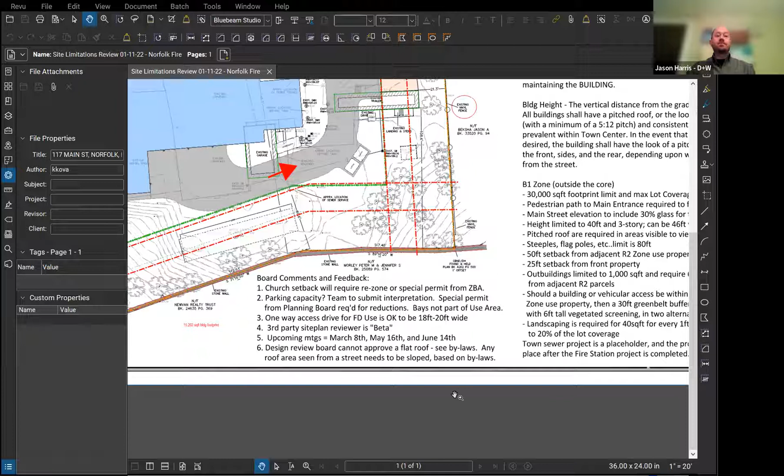So this is the west property line, this is against the church. We're going to need to get a special permit - it does not come from the planning board, it actually comes from the zoning board of appeals. We're asking to get the setback from 50 to 30, so that's the discretion that the zoning board has. The next thing we're going to ask along this same property line is the 30-foot green belt, which the planning board has the ability to waive. So 2 special permits, but really it's all rolled into one for this western property line.

One is, if we get rid of that 50-foot setback and it becomes 30 feet, then we can get our driveway in there. And then it's just a matter of how much money we need to spend on landscaping to separate our driveway from their parking lot. I think the residential screen, even if you read it in the bylaws, references the fact that residential properties want to be screened from business use.

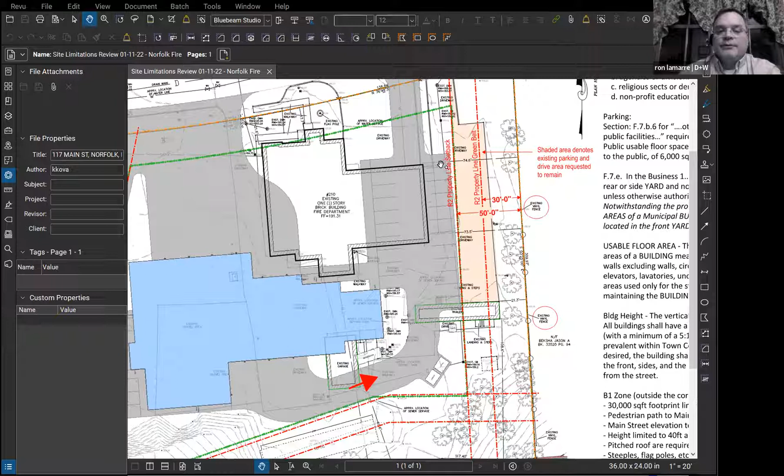So, or downtown use. So anyway, that's one. The other one is this parking - they consider this being in the front yard because the beginning of the parking happens before the face of the building. And the planning board seemed like, oh yeah, you just need to apply for a special permit, and we understand the site use and so forth.

And the last special permit we need is the number of parking spaces. In discussions with the chief, we're targeting 30 spaces. If you interpret their bylaw the way we interpreted it, you would need 20 parking spaces, in which case we'd be asking them to add 10 more.

But you could also interpret it meaning an occupancy level where the meeting room, training room becomes an assembly space, the bunk rooms become residential use. And so if we went down that road, we'd need about 50 cars, in which case we'd be asking them to back that down to 30.

So I think the way we're going to write the special permit is exactly that way. We're going to say one interpretation lands us around 20, one interpretation lands us around 50. We actually only need 30. The special permit is to allow 30 parking spaces.

And like I said, chief, if they end up saying we want you to have 31 or 29, 25 is fine with me too. As long as we get above that 20 threshold, I think we'll be good.

And just for what it's worth, every parking space, if we get the cost, we could figure out how many parking spaces and what the cost is per space. It's usually a pretty good chunk of change. And every parking space we don't need becomes less impervious surface, which means our drainage system goes down.

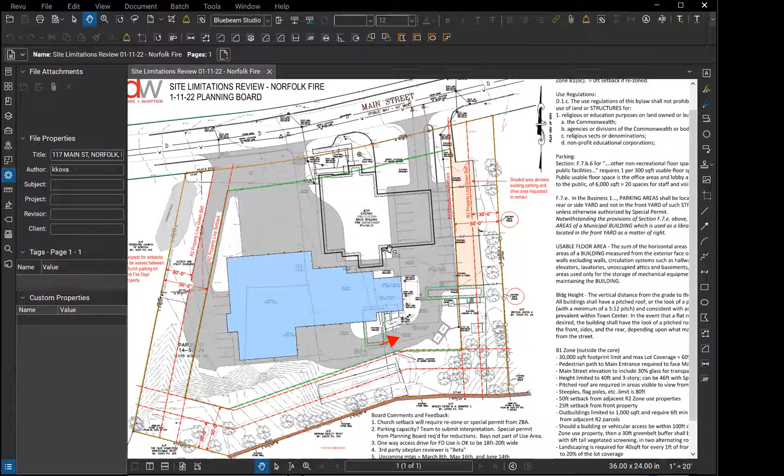Got it, sorry. But it's a good question because, Chief, if you had 40 people in your training room, how many people would you also have on shift?

I think you're going to have a minimum. We have a minimum of 4 right now, but if that meeting was going on and we had a recall during that time, it could be up to 12.

If we go based off of our numbers averages, the turnout on a full recall is about 8 people plus the 4 that are on shift. That's 12. And if you add that to 20, that would be 32.

Well, it feels a little safer to be closer to 30. Just my 2 cents.

30 was the magic number, but if it's saving us a pretty good chunk of change for 5 spots, in the event that we play the law of averages and have a full recall while there's an event going on, we'll just adapt and overcome like we always do.

I would love to have more parking, but if there's something that needs to be cut to save a little bit of money on the day-to-day operation, if we've got 25 spaces, that's plenty.

Well, we don't have to make a decision tonight, but maybe you and Blythe can discuss the idea of what's, 25 to 30 spaces. I don't know, 5 spaces is 5 spaces, right?

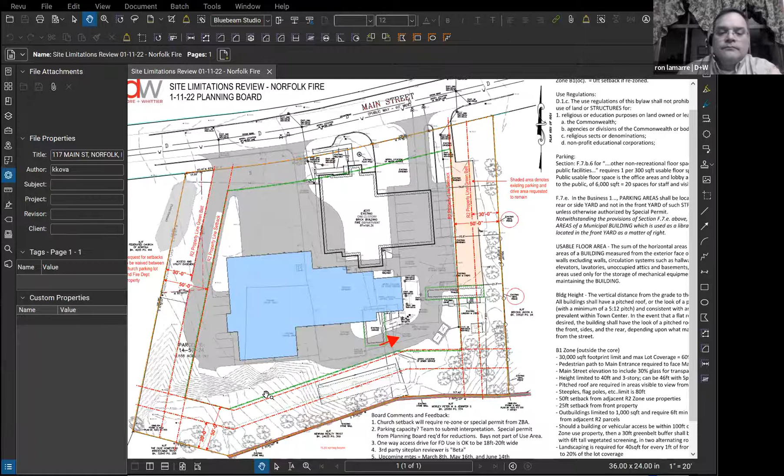I had 2 things in my notes. One was the chair of the planning board seemed pretty keen on allowing travel around the back of the building. I know we've got that large ledge outcropping there. I guess maybe we should have some sort of response next time if we're not doing it, explaining that we think it's going to cost roughly X to do that.

From a code perspective, it's not required because we don't need the additional perimeter access. It's just a convenience thing. I know on much larger projects, when you do the math and the code, most fire departments want to get around the whole building to have access. So you'll be able to park a fire truck here and run the hoses here, and park a fire truck here and run the hoses again here, without going around a corner. That's really what that 30-foot access is all about.

We are taking a look at the design of the building. We talked to the working group today about possibly pushing this wall in.

Oh, you're breaking up a little bit, Chief. While Chief is unbreaking... Oh, stuff I was going on to say, go ahead. No, we lost him again.

If stuff goes on the roof, where would access need to be to get up to get stuff?

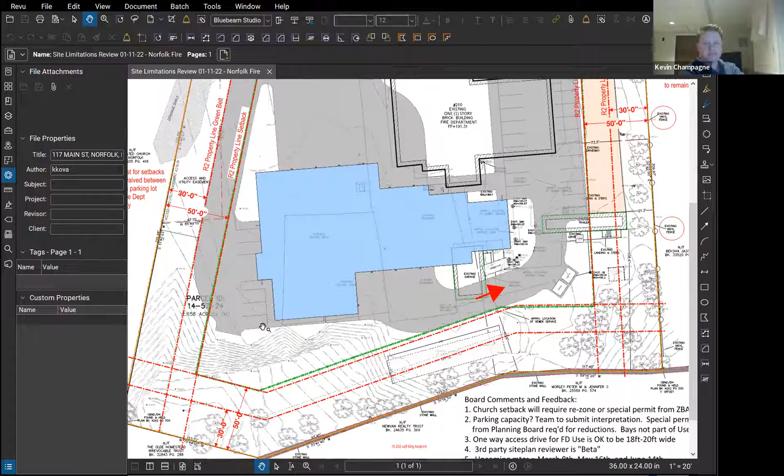If the intent is to use hoses or training in that field, there's going to need to be some sort of water reclamation or irrigation or water management that takes place in that area, even if there is ledge.

You mean talking about drains in the parking lot? If you move your cursor down towards the bottom of the screen, keep going, right in that area where you said you could run the hoses without having to run them around corners.

If they are using hoses in that area, it does put out a substantial volume of water that would need to be dealt with.

Right, but that'd be like a one-time event when the station burns down, right? I mean, the chief could speak on it based on how his operations are, but typically training with the lines takes place, or training with the pumps, and to have an area where they could do that close by, I think would be beneficial if it's within the scope of the project.

Would that be something that would take place in the parking lot, or are you suggesting something else? Regardless of where it takes place, there would need to be some sort of water management that goes along with it.

Yeah, we could potentially use that, but we have the aprons and the driveway spaces, which are great for that. And if they have drainage included, they should hopefully be able to handle it all for us.

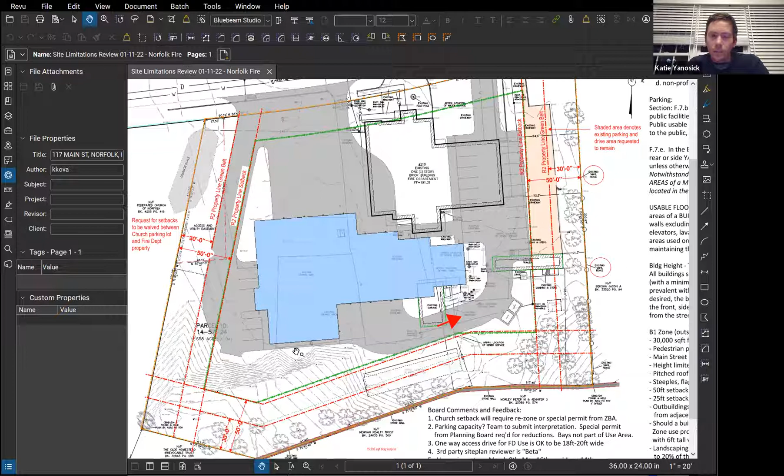Again, the chief would probably know better than I would. Well, that's another good point because your hydrant is right here, so if we did put a wall connection right there - if I could add to that too, Jason, a lot of times when we do those training stairs, especially when they're wet, we'll do a Siamese connection at the stair just for that purpose.

But it would need to supply the water to the engine company rather than have the engine company supply the water to the Siamese. Yes, correct.

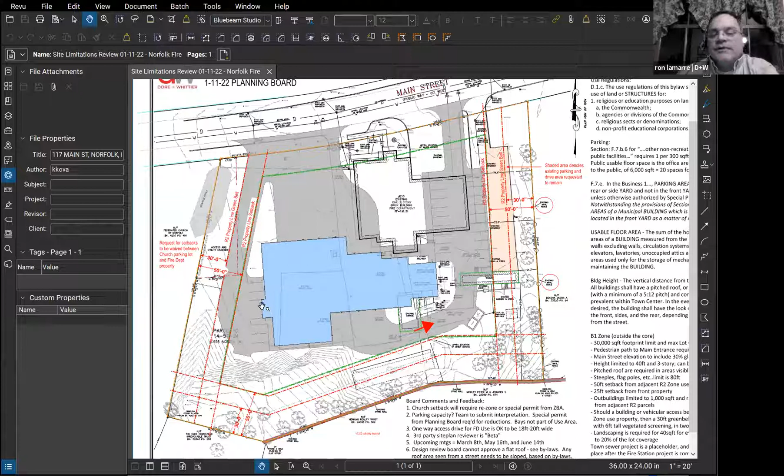I guess what Jason is saying is that the Siamese is not connected to the sprinkler system. The Siamese would not be, for training purposes - that's connected to the water line. Right, yeah.

And to that end, one thing you may want to consider—I don't know if your water district will allow this, but it's part of our notes to work out with Matt during our department meeting. Most sprinkler systems are separated from domestic water outside the building.

The question we would have is, does it make sense to have three separations? One goes to your sprinkler system, one goes to your domestic water system, which pretty much ends up in the sewer, or the septic, I should say. Should there be another dog-leg off of that line specifically for training?

Because I think, Blythe, correct me if I'm wrong, you get charged for water use based on what's going in, especially if there's a sewer project coming up in the future. You'll end up getting charged for what gets dumped into that sewer. Generally, water system and sewer charges are based on how much water flows through your meter, and the sewer is charged on most, maybe sometimes all of it.

So what I'm thinking is, do you want this off the meter? Because it's recharging the ground. But if it's treated water that the town's providing, and we charge each of our building users for water, why would we treat this one differently? That's another question to be pondering.

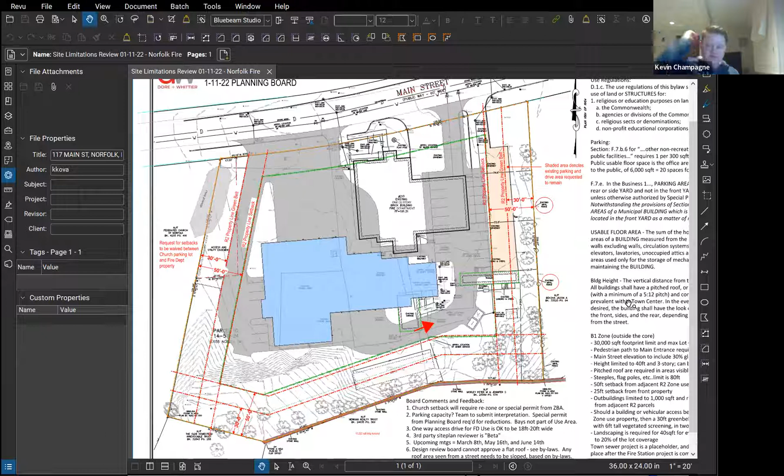Chief, you're still really breaking up. I don't know if maybe if you turn off your video, sometimes that helps. We lost you, Chief. I think we lost him.

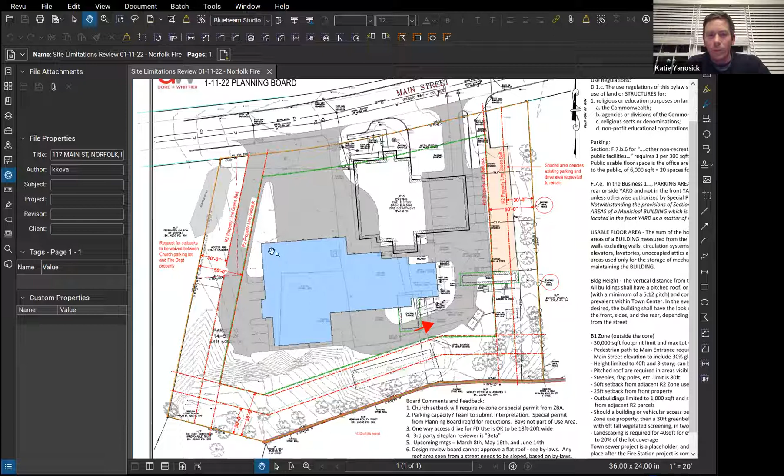I know everything adds extra cost, but I think it would be worthwhile to put a physical hydrant somewhere in that location, right here, where we're not adding an extra 300-400 feet of line or pipe. The value, it's definitely going to get used, and there will be value to it, even if nothing else than to refill the tanker rapidly during training. It's definitely worth the investment in my opinion.

But if it has to be metered, then it would have to be fed from the building, and we wouldn't do a separate street opening from Main Street. But we could accommodate, we could figure something out there. I'm not insisting it be metered.

I'm just saying we should be thoughtful about whatever we decide, because DEP really has cracked down on communities on unaccounted for water. I don't know if it happens once a year - I don't think the town really needs to be that worried about it. But if it was used on somewhat a regular basis, that could become a problem. So let's maybe in the working group really think it through and come back with a plan.

Okay. Sorry, I didn't mean to derail the whole meeting here. No, it's good, we got it written down, it's on our radar. Yeah, these are the things we need to know, right? Don't worry, I have another point later on, we'll see how that one goes. Wow, fair warning, ominous.

So is that good for the site planning board discussion? So not to belabor this, one last thing is - you said the 30-foot green belt on the west side is only needed as a residential buffer, and so we're going to try and get relief from that.

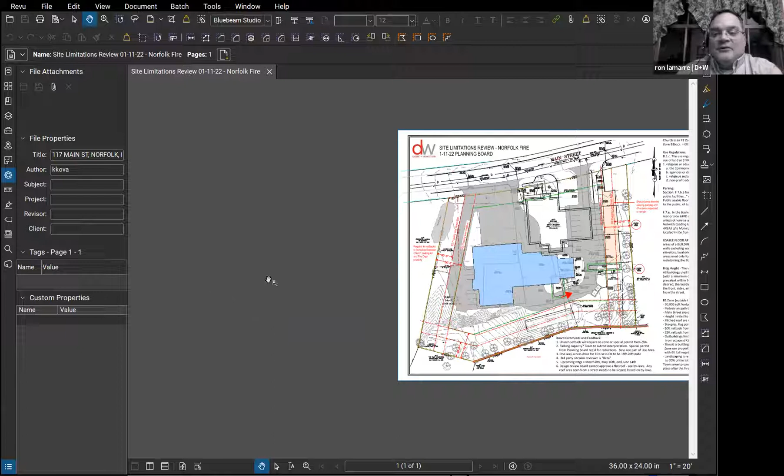Or maybe the plantings - I know there is a residence on that property, whatever the sight line is from there. The resident on that property is like, if this is our building, the church is over here, and the residence is here. I don't think that green belt's doing anything for the resident who is sitting at the edge of the parking lot of the church. But I think that's...

There's actually a lot of greenery in... Oh, we're losing you again, chief. All right, I stopped talking. Yeah, the connection is really bad. Oh my God, it's almost maybe better to call in rather than trying to use the internet connection. Could be. No, and Kevin, there is a person who's got a hand raised, I don't know if you want to take any public input. I just want to call it to your attention.

Sure, I guess if it's related to what we're looking at here. I think it's Donna Jones. Hi, this is Donna Jones.

Decades ago, I was an active member of the Federated Church. The property caretakers are called the trustees. I was on the trustees when the town and state redesigned the center of town, meaning they put in the roundabouts. The DPW director, Butch Vito, approached the church, the religious leaders, the deacons, and the trustees.

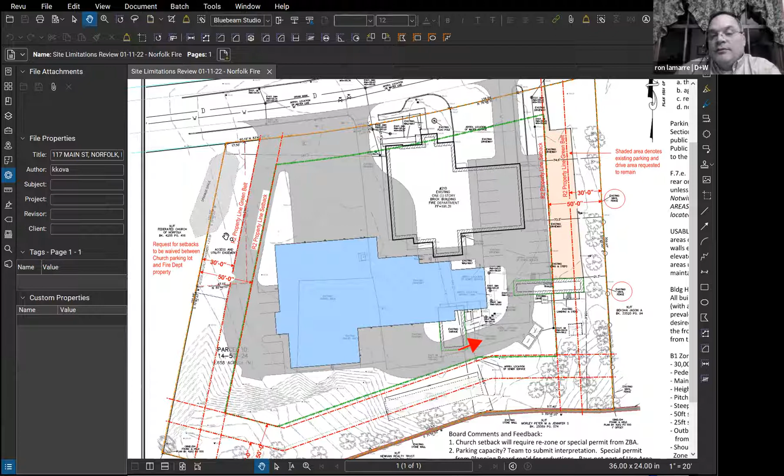I think we all understand that. And frankly, I don't think anybody on the working group or the fire station building committee is supporting or even commenting on the planning board's discussion about the church's compliance. Aside from that, I think what we're trying to figure out is do we need to plant some plantings there or not.

Ron, if I could jump in—pull up Google Maps and the conversation is clear, right?

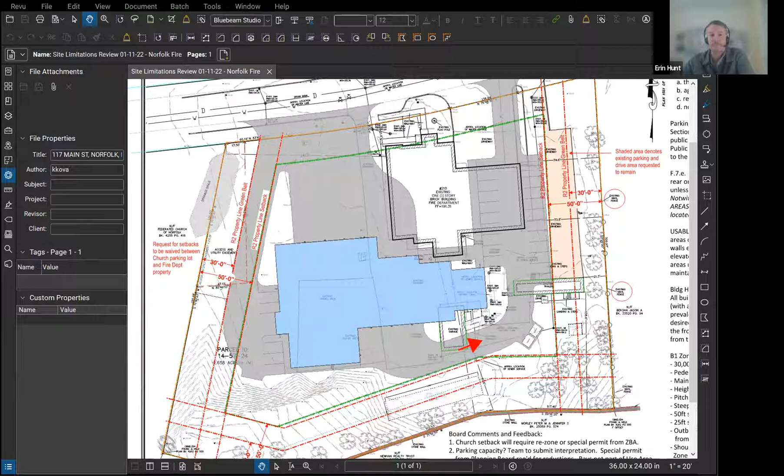Or I can share my screen if it's easier.

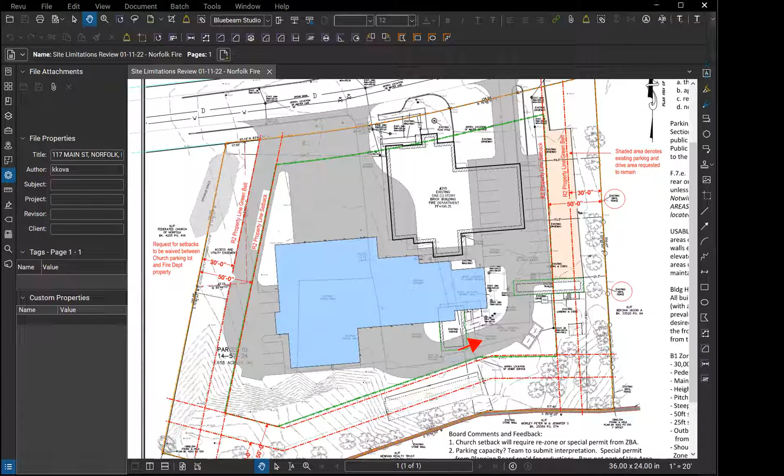Can you all hear me better now? Yes, much better. All right, perfect. I'm dialed in now. Yay.

Okay, so there we have it. I think you might be sharing the file and not your screen, because we're still looking at the planning board layout. Okay, hold on, let me stop share.

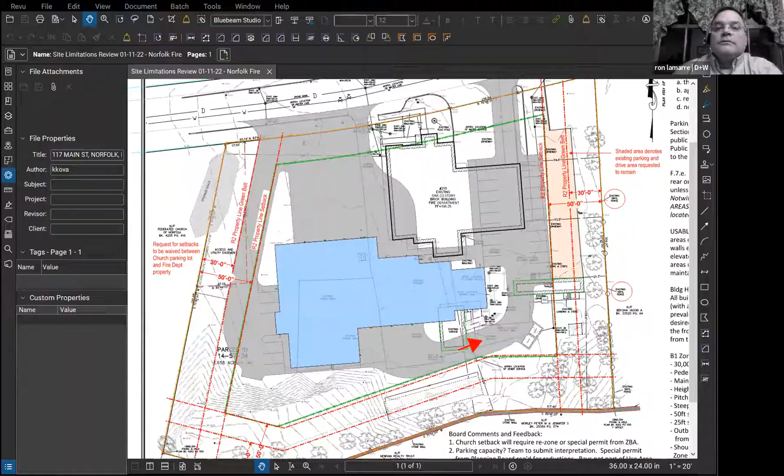Yep, better? Yep, all right, perfect. Sorry about that.

Yeah, so my point is, we're talking about buffers and property lines and what's there and what isn't there. From the residential property—that is, the house—there is a green buffer to the future fire station. You could argue that to the existing station, you could barely make it out around the corner of the trees, and the new fire station is going to be even set further back into the trees. And then there's the church property and the parking lot.

So, you know, the intent of the green buffer as it's written into the zoning is to provide separation from the commercial district and the residential districts in town.

Right, so I think this is a unique situation where we happen to have a residential property which isn't being used for a residential purpose. And I think the intent is that it will stay as a religious use for its future life. And if it isn't, it'll be an interesting conversation about whether this property should be residential or not.

I think our fire station isn't a commercial building. It's not a commercial development—it's a civic development, right? And it's a unique situation. The site plan approvals and the special permits exist for special situations.